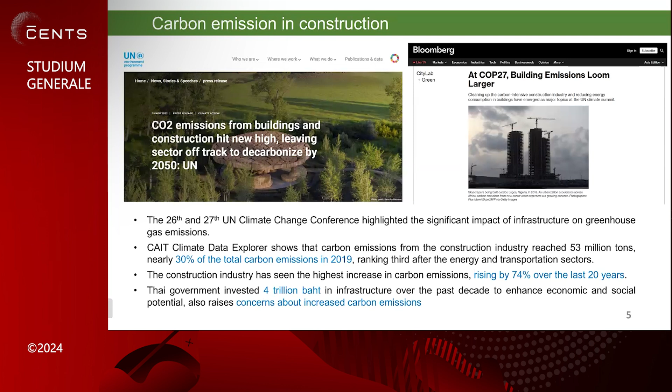So this seemed to be okay. However, if we look back 20 years, we have seen carbon emissions in construction rise by about 74%. This is quite significant, and it will become much more worrying if our government invests a lot more in infrastructure in the future. If we look back at our design and development in construction, we can see a reduction of cost and carbon together as we improve our design.

With effective design, we can reduce cost and carbon together because we minimize the use of concrete or steel, very conventional materials which are high carbon embodied materials. In this case, we can drop the carbon emission significantly.

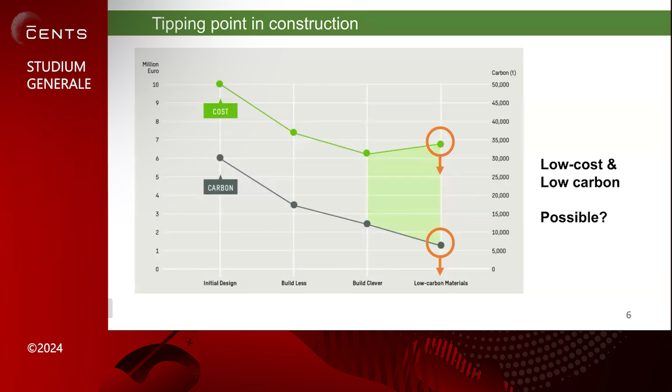However, we are now at the tipping point in construction. If we want to lower the carbon emission further, we need to find substitute materials, which may be high cost and not feasible economically for construction. So the duty of academics and researchers is to find out whether we can have low cost and low carbon emission materials at the same time, so it becomes feasible for the construction industry. I think one solution is the nature-based solution.

As we can see in the figure here, plants play the major role in carbon storage, because when plants undergo photosynthesis, they can store carbon as cellulose within themselves. This provides the largest pool of carbon storage compared to other living material. So when we consider nature-based approaches, integrating trees into our slopes or infrastructure, we can provide the largest carbon storage.

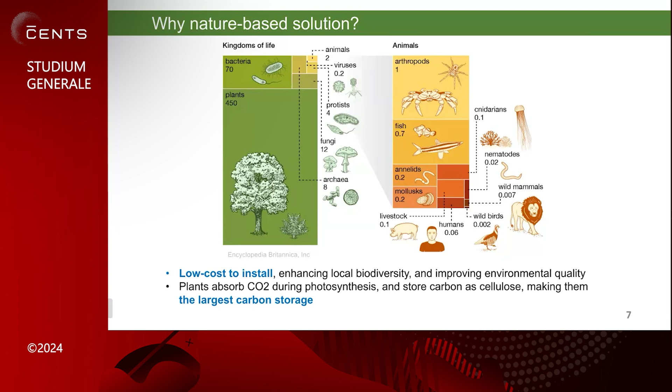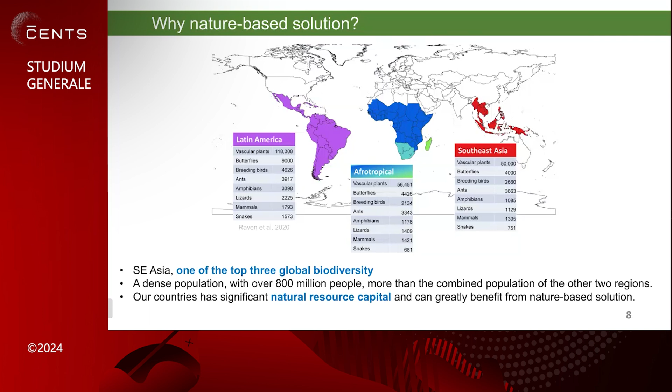Planting trees also provides a low-cost solution for improving our environment. We have great potential because Southeast Asia is one of the top 3 largest global biodiversity regions.

This can provide an increase in shear strength and hence a mechanical root reinforcement to the slope. The tree and grass are living materials that need water, so when they remove water from the soil, the shear strength also increases. Hence this is a dual contribution for mechanical and hydrological improvement to slope stability.

However, we need to be concerned because these living materials can grow and decay. They might have the benefit of restoring function and repairing damage to the root, producing new roots to provide reinforcement. However, we need to understand that variation as well.

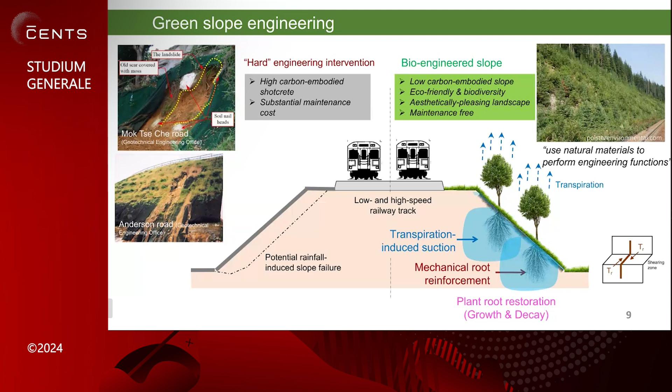So come to the point we need to consider. Nowadays we have a lot of problems from climate change, extreme climate, a lot of intense rainfall that might cause slope failure. Our embankments, often made from clay and fine grain material, can shrink and swell a lot during seasonal variation.

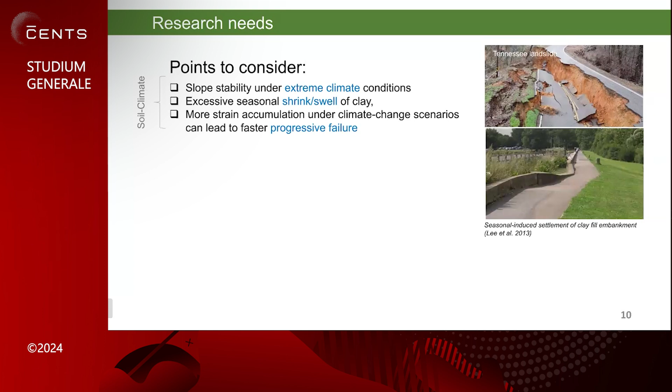This can happen and provide a problem to our serviceability. This can accumulate year by year, and at the end of the day can generate progressive failure. So once we integrate the plant in, the plant also plays a significant effect on this stabilization.

The plant can provide reinforcement and soil hydrology, but we need to see how that effect works. We also have the effect of growth and decomposition of the root that can change the properties of the root and change the pore space of the soil.

This eventually affects slope safety and serviceability, so we need to consider whether the soil bioengineering method is capable of improving both safety and serviceability of infrastructure or not. In this research we will dig down into this.

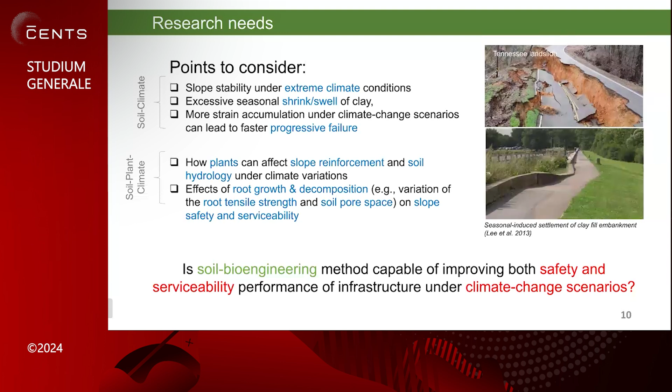I would like to start with the small scale first. We are studying in the lab. We plant the grass in a column, and then divide it into two parts. The first part we use for the direct shear test, and the bottom part we use for the tensile test.

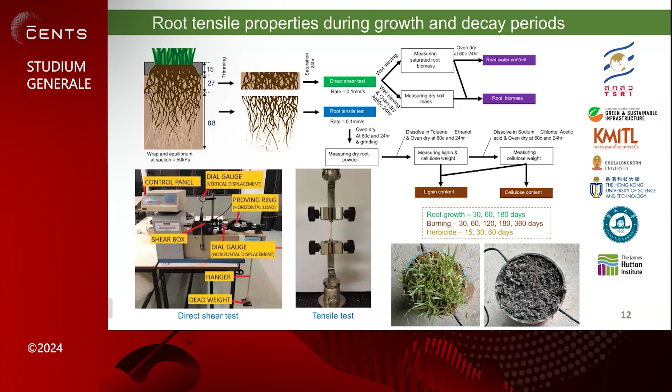We are not focusing on only one particular age of the plant. We are studying it during the growth period, whether 1 month, 2 months, 6 months, and we also kill the plant by different approaches, either burning or herbicide, and wait for a long time so we can see the gradual decay of the root material, giving us the complete property change of the root over time.

As expected, we can see that the tensile strength of the root improves along the growth period, as shown in the top left figures. Once we kill the plant with herbicide, the chemical goes into the plant and the root is killed immediately, so the tensile strength of the root drops very significantly and very fast.

Compared to burning the plant, when we burn the plant, the root inside the soil decays naturally, and that decay process is much slower. So we can see that the plant can still maintain tensile strength until a longer term, let's say 360 days, before the tensile strength is reduced substantially.

And again, with the nature-based solution, we try to bring in the other living organism. We bring in the fungi to improve this tensile strength. We can see that during the growth period, the tensile strength has been improved with the integration of the fungi, and also it remains much more once we integrate the fungi into the root, even during the decay.

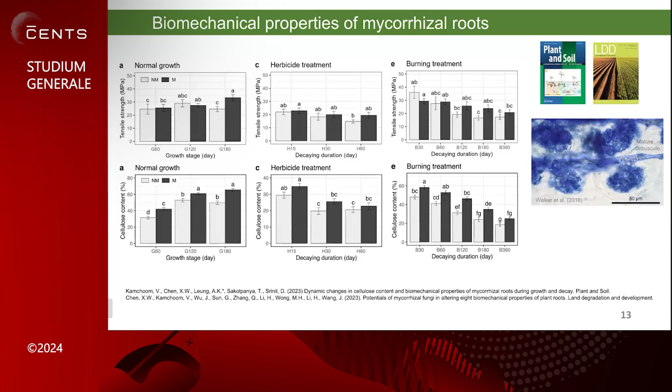So this can provide the suggestion to the engineers that we can also use the root and need to be concerned during the decay, and then we can also integrate the fungi into that to improve this reinforcement. And not only the tensile strength of the root, once the root has penetrated down into the soil, they can provide reinforcement to the soil, increasing the shear strength. But this is subjective. It's related to how much root is in the soil, and also what the orientation of the root is.

So in this case, we have the solution by planting the root in the rhizobox, where we can see the distribution and the magnitude of the root along the depth very clearly. So we plot out the root biomass or root area ratio, the diameter, the orientation of the root, and eventually we shear it in the shear box. So with the direct shear test, we can see that the black dotted line is the bare soil here.

And then once we plant the vetiver grass in this research, we have a significant improvement from either the red or the blue line. These are different species of vetiver, but both of them improve the shear strength significantly. So in these situations, we can also find out the cohesion and friction angle improvement from the reinforcement of the root. And then we can suggest these parameters to the engineer for the design, then incorporate them in the construction later.

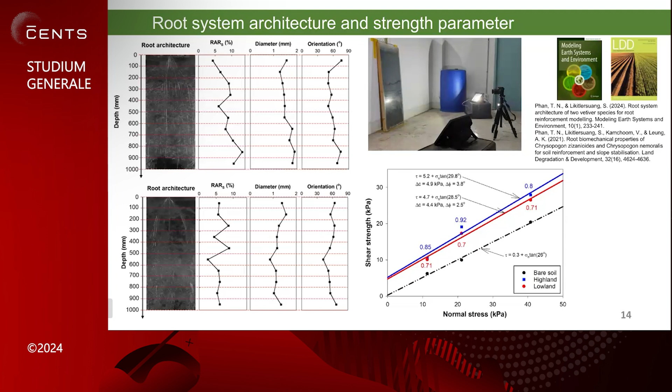And as I said, we also study the different ages of the plant as well. So we can see during the growth period, at the early time here, the shear strength was improved quite significantly. But then once we kill the plant, the decay started. With the herbicide, we can see that the shear strength decreased quite significantly, and it's almost decreased even below what it was for the bare soil without any grass.

For the decay process, once we kill the plant by burning, we see the shear strength also drop down much more, even worse than it was for the bare soil. So we are not trying to oversell this knowledge that we try to use the nature-based solution. It might provide positive effects, and it might also provide negative effects. But once we study it very completely here, we can have the solution, the suggestion to the policymakers if we find that the plant has been damaged.

So if it was decayed by the herbicides, within 2 months we need to find an alternative or mitigation to suggest and improve the stability. So we have a time span between 2 to 4 months. In this case, we can find or suggest the alternative mitigation.

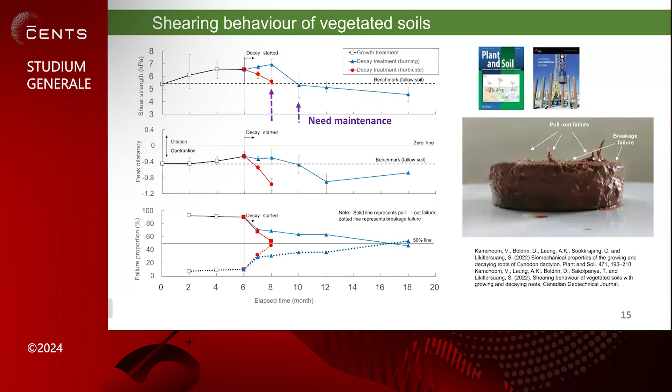And again, we would like to go a little bit into the bigger picture. So we would like to see the safety and serviceability of the slope. For the safety of the slope, we make the slope model. In this case, we employ the geotechnical centrifuge machine. Some of you might not know what this machine can be used for. With this machine, we put a small, reduced scale model into the arm, and then we spin it up. So the model will receive an enhanced G level.

So as you can see from this equation, once we increase the G level, we can reduce the size of the model, and the model still has the same stress condition as the bigger prototype in the field. As you know, soil is stress dependent. The same soil at shallow depth and deeper depth may have different behavior because the stresses they receive are different. So this machine allows us to use the small scale model with the enhanced G level, and then it can have the same stress and be comparable to the bigger model in the field.

So in this case, we use the slope model, as you can see on the right figure here, and then we embedded it with the plant model. We made the plant with cellulose acetate, which has similar mechanical properties to the real plant, and then we connected it with a pipe to a vacuum source so that we can simulate the transpiration of the plant. So in this case, we can simulate both mechanical reinforcement and transpiration as well.

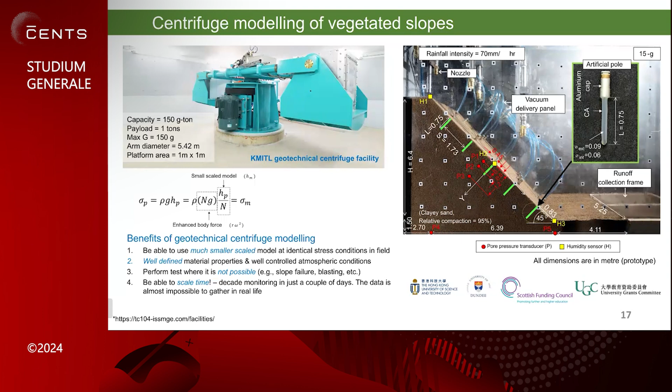So I would like to highlight the key important thing here. As you can see, for the 45 degree slope, we don't see any failure. That means with the root inside, with this configuration of the root, it's sufficient to maintain the stability. So we want to go more extreme than that. We increase the slope to 60 degrees. So we can see either we put the tap root or the heart root shape with different geometry, both of them still fail.

So again, we don't want to oversell this one. We can see that even though the tap root failed after 3 hours, the heart root provides better stabilization, it can delay the failure to 5 hours, but it still fails in any case. So that means that the nature-based solution using plants here is only good for slopes less than 45 degrees, and for any steeper slope than that, we may need to rely on conventional mitigation, let's say the retaining wall or retaining earth structure.

However, this is already a good contribution because 70 to 80% of the man-made slopes that we have are not that steep. It's like 30 to 40 degrees, that is already steep enough. So if we consider that number of slopes, if we can replace them with the nature-based solution, it can reduce a lot of the concrete that needs to be used. So this can be another alternative that engineers can consider.

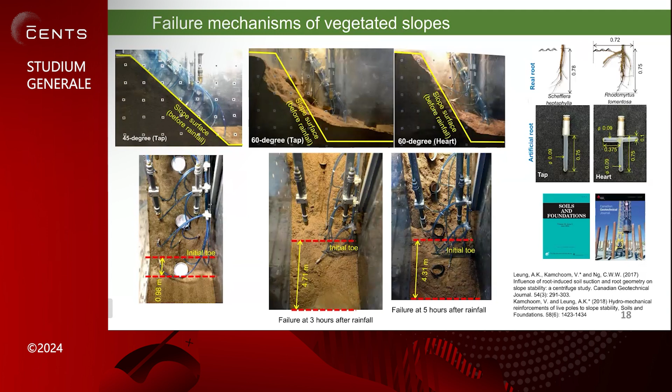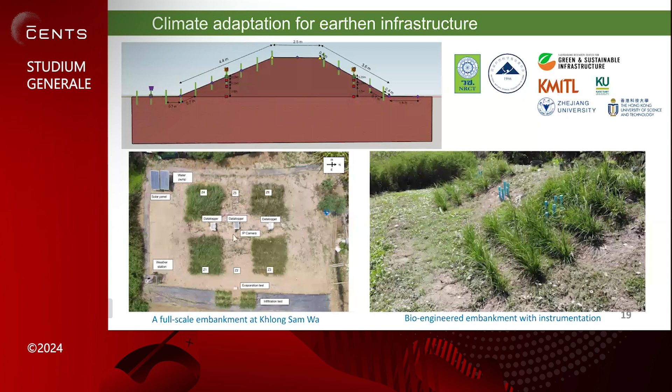And we also consider the serviceability as well. So in this case, we go into an even bigger scale. We conducted the full-scale test. This research has been supported by funding from NSFC in China and also funding from Thailand. In this full-scale embankment, we divided it into 6 different zones. Four zones, as you see from the figures, are planted with vetiver grass, and in the middle 2 zones, we left it bare for comparison.

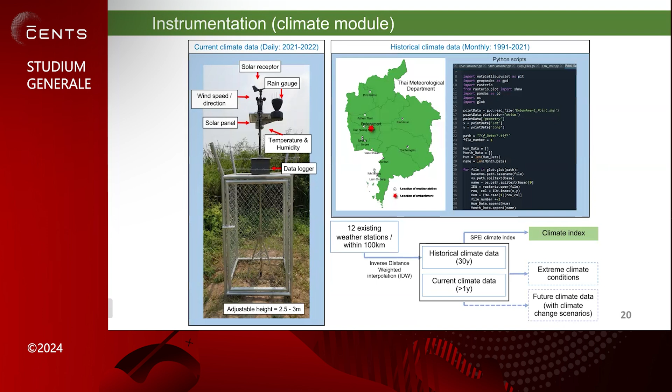And we have a number of monitoring sensors. We have the weather station, so we can have the climate parameters, and we also collect the historical climate from different stations. In combination, we can calculate the climate index, which can tell us whether the current climate is already extreme compared to the historical climate or not. And with all this data, we can also predict the extreme climate in the future as well. And not only the climate module, we also have measurements for the plant module as well.

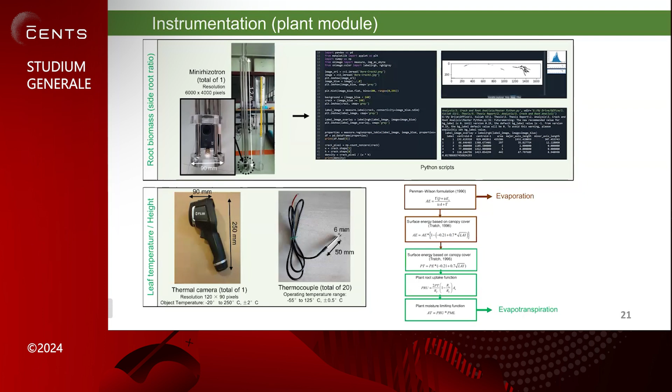So with this procedure, we can get the root area and also the crack area that develop differently along the different seasons. And then we can also have temperature measurements for the leaf and the soil so that we can calculate both evaporation and evapotranspiration as well.

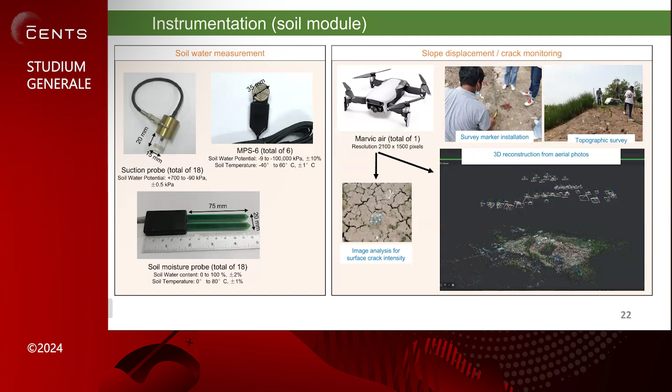And for the soil measurement, we have the suction measurement, or the negative pore water pressure measurement, and we also have the water content sensors so that we can measure the response of the soil along the season. And for slope displacement, we have topographic survey, and then we have the drone taking photos, and then we do the 3D reconstructions so that we can have the profile that's changing along different seasons.

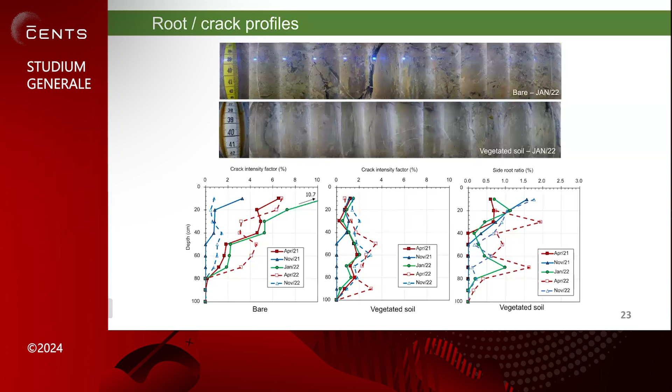This is very important from the engineering perspective, because if you think about it, when we have the clay embankment, sometimes we get the monsoon rainfall during the dry summer. Usually the clay embankment has low permeability. The water cannot get in easily, but once we have cracks, the water can get in and can eliminate the stability very, very quickly. So by planting the grass and the trees here, we can minimize those cracks quite significantly. So it can be a major contribution to be considered as well.

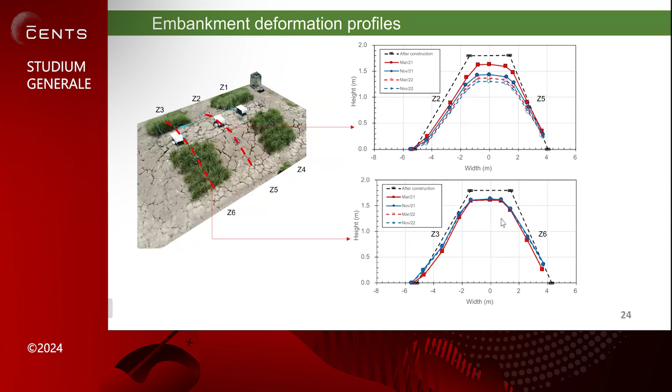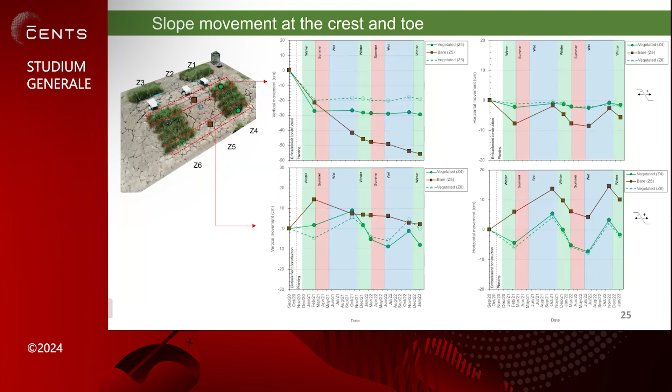So this comes to the good conclusion that we have been studying the shear strength over the growth and the decay period to study the root biomechanical change, and can suggest the parameters to the engineer for the design as well.

And of course, we study the plant that could stabilize a 45-degree slope, which is a big contribution already, because most slopes are not that steep, up to 45 degrees. And then of course the root can also minimize the cracks and reduce the moisture fluctuation, and that can contribute to the stability as well.

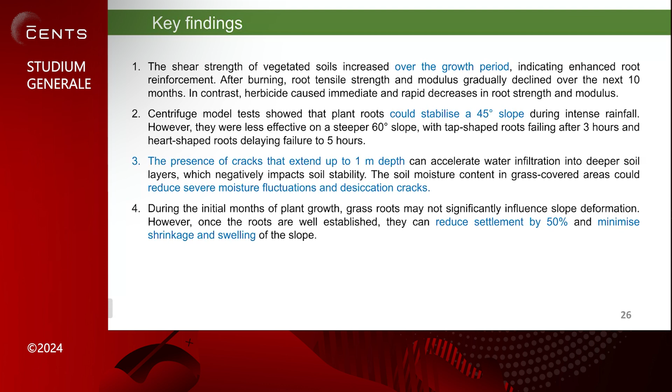And of course, the plant, as you can see, can minimize the settlement by up to 50%. So that is also another contribution that we can consider. So in this case, we can see the plant can improve the safety and serviceability of the slope. So before, I would like to give a final note about achieving net zero.

Nowadays, we are concerned a lot about carbon emissions. And as you can see, carbon emission nowadays is mostly from the earthwork and the pavement for our construction industry. So if I try to calculate the carbon emissions, we can see that with the conventional material, we got carbon emissions of more than 30,000 tons per year.

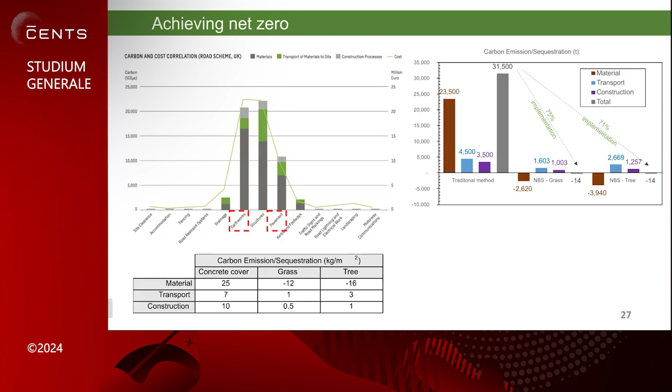But once we try to integrate the grass and the tree, the grass and the tree actually can provide a negative carbon emission, or we call it carbon sequestration. In this case, in total, we don't need 100% usage. We don't need to use the grass and the tree for every earthwork and pavement. If we use about 70 to 75%, we can already achieve net zero, which is important and contributes much more to our country.

So the final note that I would like to give to you: there are always risks in engineering. We need to maximize the social benefit while minimizing the human risks. So what can the risks be? If we use the nature-based solution, of course there can be risks of the variability of the plant species, of the growth period, of the different geometry, and even the growth and the decay period.

These also affect root properties, reinforcement and stability as well. However, all these factors, as engineers, academics and researchers, we can study and consider, as I presented in this presentation. On the other hand, there are also risks if we are not using nature-based solutions.

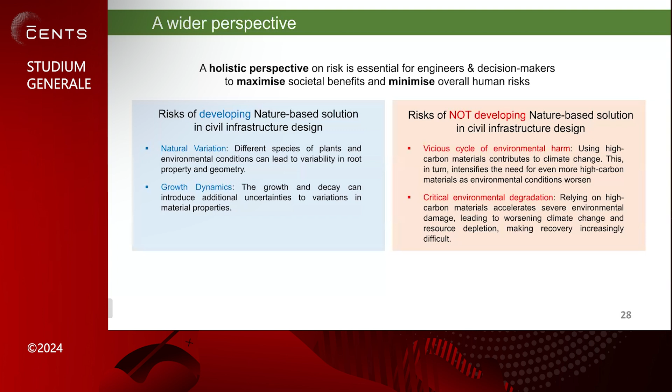Of course, if we rely on conventional material, we need to use high embodied carbon material, and that provides a vicious cycle: it worsens the climate, and we need to use even more material, more carbon emission. Up to a certain point, we are beyond the critical point that is not reversible anymore. So we need to balance out the risks of using it and not using it. So I would like you to consider taking the risk of using nature-based solutions for the improvement of our future generation.

So for all of this work, I would like to thank the contributors, especially my PhD students. Both of them come from Indonesia as well. So I'm really glad to be the advisor, and also thanks for the contribution from all my colleagues, both local and overseas.